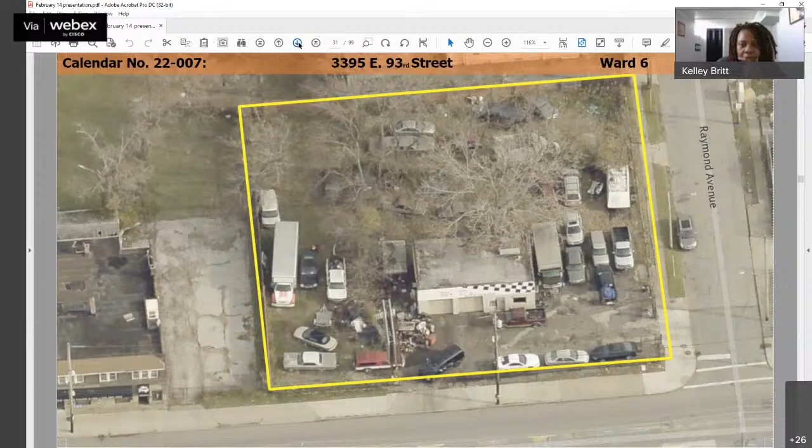Okay, thank you. Mr. Wilborn? Yes. Go ahead, present your case. Yeah, on my—

Well, first of all, I received a grant loan from the city of Cleveland back in 2012, and everything that they asked me to do as far as with the landscaping, we did all of that. We made the ample parking spots and also added gravel as it was instructed to do.

Madam Chair, this is Kim Scott, City Planning. May I offer a comment, please? Yes, go ahead. Sure.

The issue at hand is establishing use as a repair service facility. And what happened was that had not happened—there was never a change of use to auto repair this round. Obviously, as Ms. Kukla was reading the history, an automotive repair use was established in 1977.

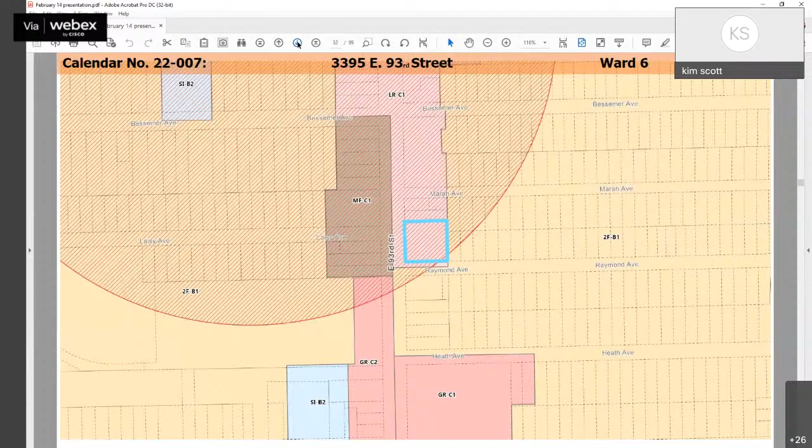Mr. Wilborn has operated this since 2012, and I think it was just that he was not aware that a change of use needed to be done. As he also mentioned, he did participate in the storefront renovation program. So I just want to say that City Planning, in fact, is in support of the variance needed to establish the use at this location.

Thank you. Thanks, that brought some clarity because I wasn't exactly sure what was going on here. Okay, so all the requirements he got last time he did, but there was a failure to actually change the use from—was it a service station previously? Gas station?

At some point it was... I'm sorry, go ahead, Ms. Kukla. Yes, Madam Chair, it was erected in 1940 as a service station. And just for the record, the resolution did state that the city only required the customer parking area to be asphalt, just for clarification.

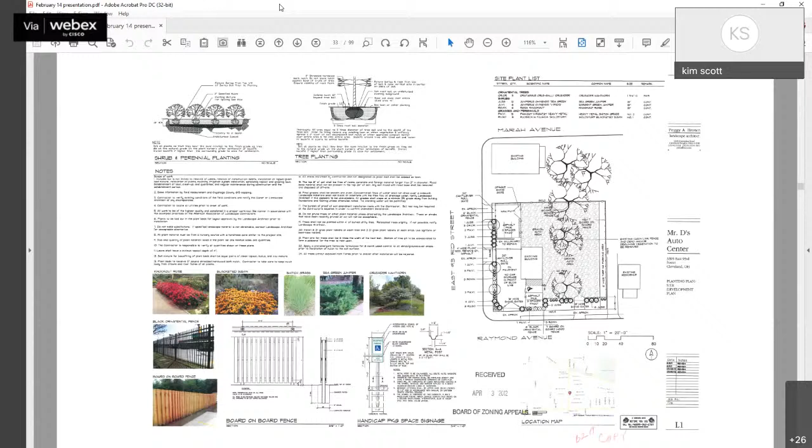So are you saying that hasn't happened? No, all of the things that were asked to be done had been done. Okay, so we're basically just here for the use. Correct. And what we're seeing on the screen here is the actual landscape plan and parking plan that got done previously. Correct.

Okay, Councilman. Thank you so much, Madam Chair. I support this change. Mr. Wilborn is a very well-respected member in the community. I think this is a much-needed upgrade to what he's trying to do. He's a great business person and really just needed clarity. I spent a lot of time trying to understand what he really needed, and he complied with all of the things before. He just wants to make sure he has the change so he can continue to operate his business, which most of the community are very supportive of. Thank you, Madam Chair. Thank you, Councilman.

All right, I'll open up to the board for any questions, comments, or a motion. Madam Chair, unless any of my colleagues have comments, we'll go ahead. We would like to thank City Planner Kim Scott for the clarification on the situation in this case, and with support of City Planning, and also thanks to Councilman Griffin for his statement and support. It seems like this just needs to have the I's dotted and the T's crossed. So, Madam Chair, with that, I think we can go ahead and approve this variance. Thank you. Can I have a second?

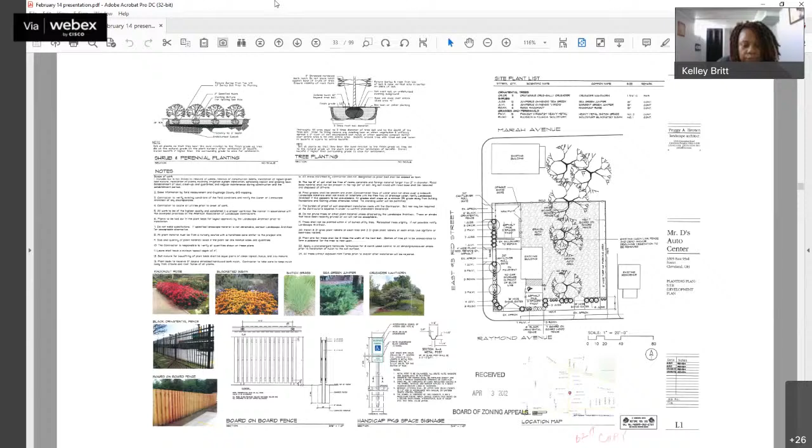Member Brown, I second. Ms. Brown the second. Go ahead, call the roll, please. Thank you, Madam Chair. And this is also with the understanding that the customer parking spaces will be asphalt as shown on the site plan, and all of the landscaping shown on the site plan, which may or may not be fully compliant, as I'm not sure that we saw a 6-foot wide landscape strip along the front or the 10-foot wide transition strip at the rear. The site plan does show that there are some. So with those conditions, I will call the roll.

Ms. Barnes? He's recused. Brown? Ms. Brown? Yes. Thank you. Ms. Bates? Yes. Ms. Britt? Yes. Calendar 22-001 is granted. It'll be ratified next week, and we will send the appellant a letter.

Isn't that 007? Did I say one? Yeah, or is it 7? I have 7 on the agenda. It is 7. It is 7. I apologize, just want to make sure I get it right. Thank you. It's Monday. Yes, thanks. All right, moving on then.

Calendar number 21-203 at 8502 Hough Avenue. Structures Unlimited proposes to construct a new non-separated mixed-use retail office and assembly building on City of Cleveland-owned land in a multifamily residential district. The owner appeals for relief from the strict application of the Cleveland Codified Ordinances as stated in the agenda and the public record. Of note is number 2, section 357.07A, which states that a 10-foot setback is required on Hough Avenue and a 4-foot setback is proposed. Please note that the Board of Zoning Appeals is limited in its ability to grant front yard variances unless certain conditions apply, and we know this happens to us frequently with front yard setbacks.

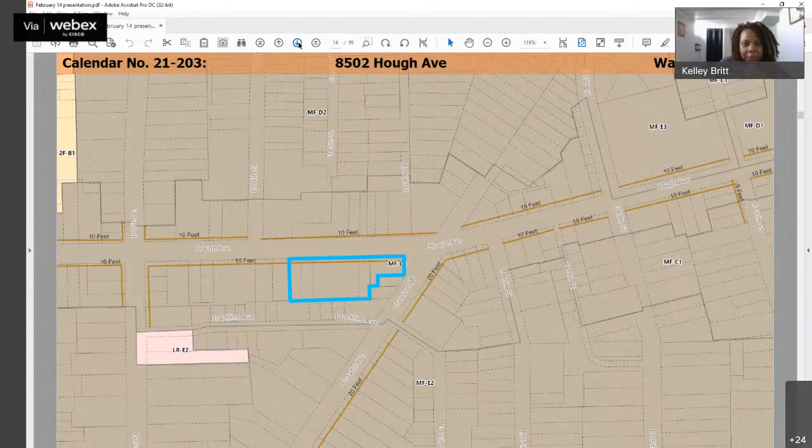Maurice, I'm going to ask you about this front yard setback before we get started. Yes, Madam Chair, we have already had extensive discussions with the applicant about this. They do not meet any of the exceptions for the board to grant.

So what we are going to do here, as we've discussed with the applicant, is go ahead and change the mapped setback in this portion of Hough Avenue. So we would request that you continue to consider this and just not approve the setback variance. That way they could still continue forward with their permitting process. And when the map change is actually enacted by council, they would no longer need that variance.

Thank you. So I like to hear. All right, I know you do. Okay, who is going to be the spokesperson for this case? I will be, Ibrahim Hakki. Okay, Mr. Hakki, go ahead.

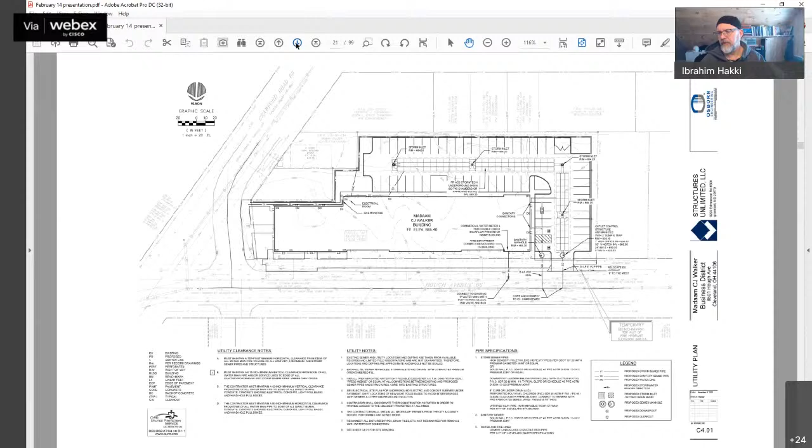And with that, we're asking for approval for the change of use. And then I can also speak regarding the landscape buffer. If you can go to the 8th drawing, which is the architectural site plan. That one, oh, go back. Did I just pass it? That one? Right there. Okay.

So we do have the parking tucked away to the back side as much as we can, with an entrance off of Hough. The landscape buffer is between the sidewalk and the parking. Unfortunately, we could only fit the 4 foot in there, so we're asking for relief to use a 4 foot landscape buffer rather than the 6 foot landscape buffer. To extend it out, we would lose 2 parking spaces specifically, which we feel we would really need to support the retail use of this building.

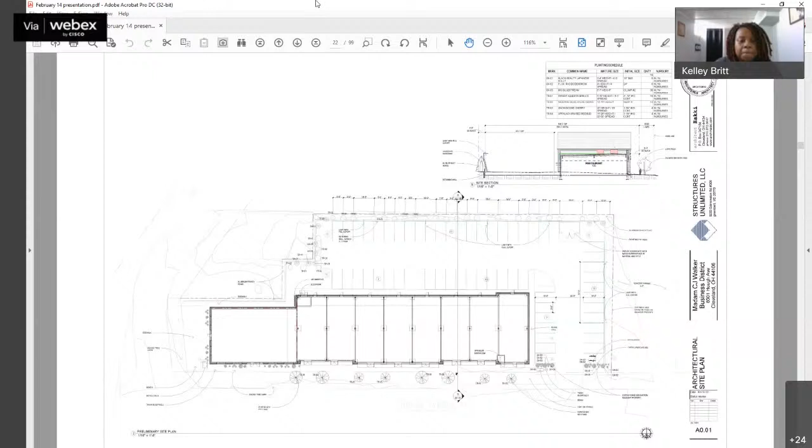Okay, Mr. Salam, did you have anything you wanted to add? Yes, thank you, Madam Chair. We've been working on this project for the last year and a half.

We were very pleased to come into the Hough District and develop this project, which is very important to the citizens of the Hough District, knowing the history of Hough and it used to being a very vibrant commercial and residential center. We feel strongly that this will add to that historical flavor, but also move it forward, as it will be an entrepreneur incubator along with a credit union, because we know in this area there's a financial desert in the Hough District. Our goal is to really try to implement the needs of the community and give it a real sense of place.

No better situation could be than naming it after the first millionaire, black or white, in this country, Madam C.J. Walker. And so we really feel committed to this project. We were very happy to hear the concerns of the board about the setback, and we see that often in many of our projects, but it's nothing we can't overcome.

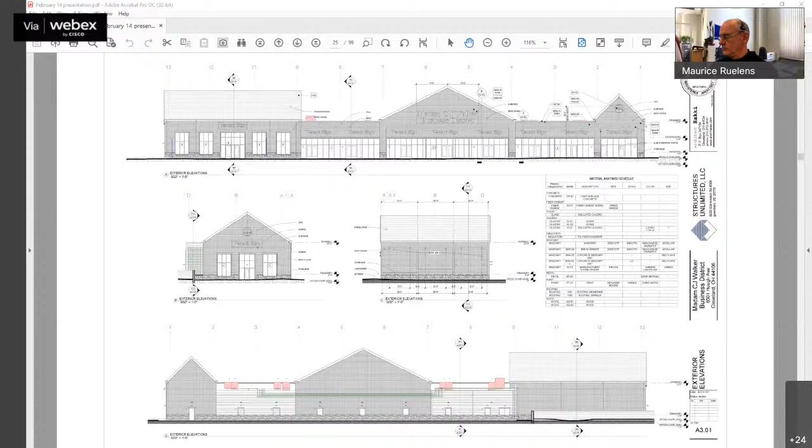Thank you. Liz, is that okay with you? I think that clarifies the question, Madam Chair. I'm not sure if that would be something the board would want to hold ratification until we see transfer. We've done it both ways in the past, where the board has granted the variance and just allowed the land bank process to work out on its own. They are two separate approvals.

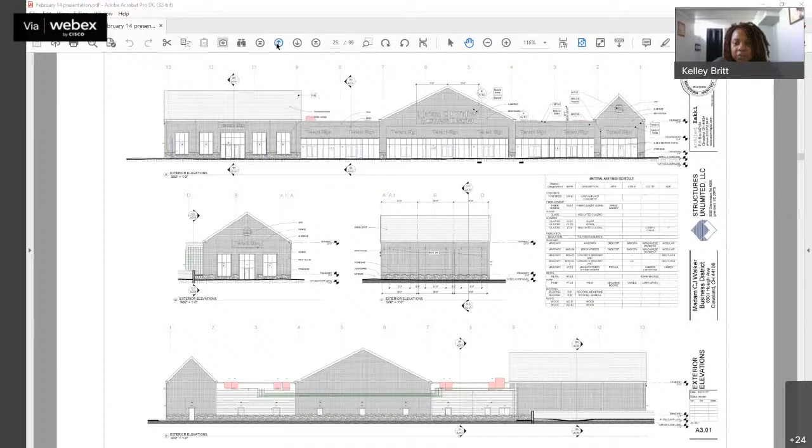All right, I'll open up to the board for any questions or a motion. If you do put up a motion, I would recommend language about waiting for clarification on the land bank transfer, as well as not granting this front setback issue, because that's going to be changed. So go ahead, board. So, Madam Chair, you want to hold ratification until we have verification of the transfer? Yes. Okay, all right, unless my colleagues have any other questions or comments, I'll go ahead.

All right, Madam Chair. Given testimony from Ms. Scott from City Planning and a statement by Mr. Ruelens, also from City Planning, the appellants have stated their case.

We are aware that there are many projects going on in the Hough neighborhood, particularly residential and multifamily, and this project will support those. So pending notification that the land bank property has been transferred, we'll hold ratification for that. We will not be addressing item number 2, regarding the front yard setback, so we'll go ahead and approve item number 1 and item number 3 on the agenda today.

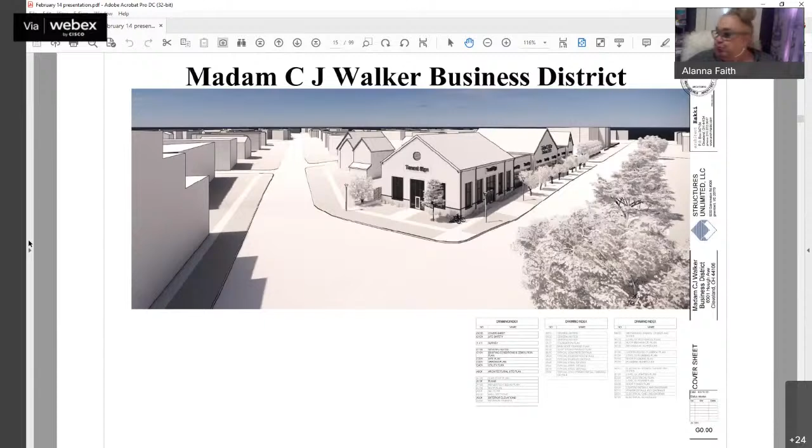Thank you, Madam Chair. Ms. Brown? Yes. Ms. Barnes? Yes. Ms. Faith? Yes. Ms. Britt? Yes. Calendar number 21-203 is granted conditionally.

We will hold it until we get clarification from the land bank regarding the land transfer. Once we receive that, we will send the applicant a letter. Thank you.

You're welcome. Oh, we have 176 next. Okay, yes. All right, go ahead. Moving on, Calendar number 22-008.

This is at 1269 West 76th Street. John and Tamara Lagutia, owners, propose to change use of an existing one-story masonry and frame industrial building to a single-family residence with a new attached garage addition in a G3 multifamily residential district. The owners appeal for relief from the strict application of the Cleveland Codified Ordinances as stated in the agenda and the public record.

With that, Madam Chair, I'll turn it over to Ms. Brown for the oath. I'm swearing in all who are present for this case. Do you swear or affirm that the testimony you're about to give is the whole truth and nothing but the truth? Please raise your hand and reply, I do. State your name and your address, please.

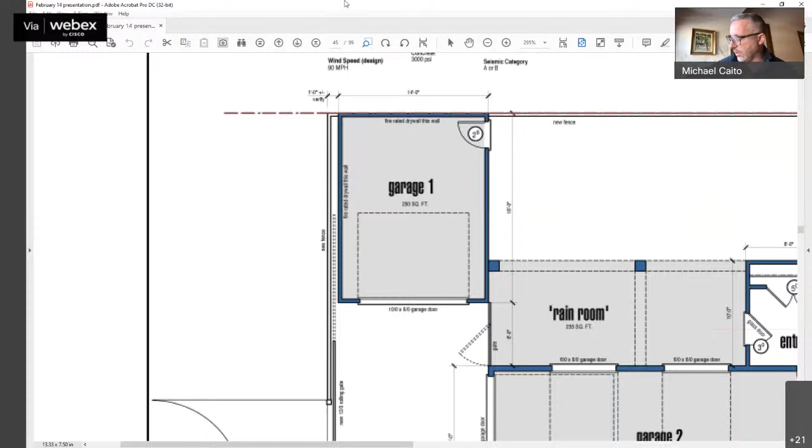Number 4 is really about fencing. States that a fence running parallel to a building on the same lot shall not be less than 3 feet. So code says we have to have 3 feet between a building wall and a fence. We're proposing 2 feet and 1 foot.

So I'm going to explain the 1 foot. It's on the left side of garage 1, where the automated gate is going to retract into. It's not really a space. We're going to have a wood gate that retracts back, sliding into a pocket, so that when closed it just looks like a clean wood fence going across garage 1 and the driveway.

The other dimension of 2 feet is not correct. It's actually 2.8 feet. One of the drawings I had earlier in this PDF shows that the existing building is 2.8 feet off that top property line. So the top line that goes across is really 2.8 feet, not 2 feet, from the building. Minimum distance is 3 feet according to code, so we're really just 0.2 feet off of that minimum. That's a very, very minimal variance we're requesting.

That is going to be a 6 foot tall fence, and the reason is we have these large windows we want to maintain. That 6 foot fence gives us some privacy directly to our south, which is again above that fence - just a vacant lot. We're not sure what's going to happen there.

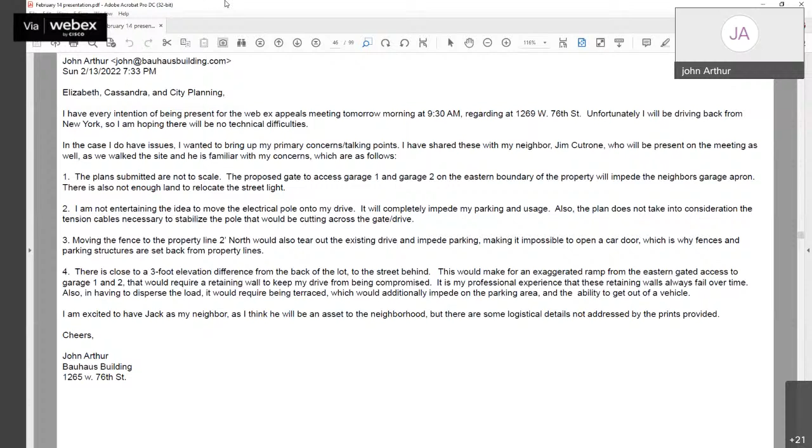My primary objection is based around my current drive and what it looks like moving the electric pole into a parking space in my drive. That's my primary objection to moving that. If it's going to be moved, I think it could be moved farther south.

The other concern I have is that while the building addition stays within the current lines, even 2 feet off the property line, the fence shows it jutting in to where you pretty much can't open doors, which would completely take parking away from my drive. I'm also not sure, given how aggressively sloped that drive is, that the apron going into 75th would need some kind of terraced retaining wall, which would again take away parking, because there's about a 3-foot elevation gain from 75th to where our lots are situated.

Where are your lots, sir? I am number 38 there.

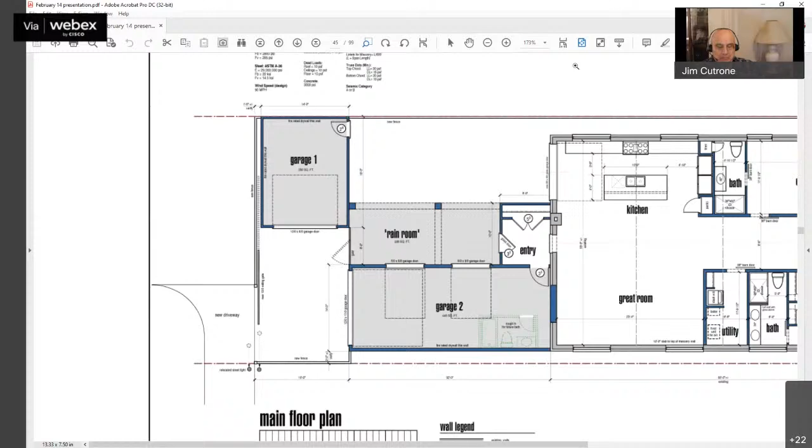Madam Chair, could I speak? Oh, I'm sorry. I also don't know how they would handle having a retaining wall there, with the grade that would need to be achieved for that apron. Okay, so your issues today are the utility pole and the grading of their property and how it will affect your property. Correct. Okay, Mr. Arthur—

Mr. Cutrone, is that who wanted to talk? Yes, that's correct. Okay, go ahead. Thank you. First of all, I'd like to welcome Jack and Tamara to our neighborhood.

I've lived here since 1989 and been active in the neighborhood. I've been through all the design efforts for Battery Park. I've seen a lot. I've been active in the block club, was co-chair for 18 years. So my background in the neighborhood is extensive.

One thing I'd like to point out is that these properties are artifacts of a different time, and it's difficult to fit them into the Battery Park scheme in a very superficial manner. The plan described by the architect is very nice—I congratulate them on how they're treating the property—but it was all about this property.

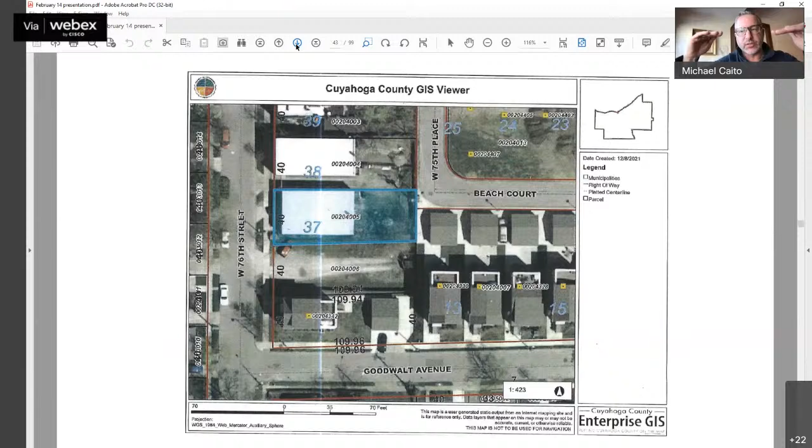Yes, I will. We have not studied the topography yet of that rear apron that's coming in. So what we usually do is, we would probably set the two garage slabs down a little bit and lower that driveway just a little bit to transition to West 75th Place's grade. Again, when we were out there, it looked like it was relatively flat, but I understand that there might be a slight change in grade between the alley and our current rear yard.

In response to, and I totally agree with all the comments that were made today, I think all neighbors need to get along, and we don't want to ruin the ability for someone to use their property for whatever we are doing. But the fence that we are questioning is right on this screen. If you're looking here, that fence that's along the property line, that's not even something we're asking. That's not a variance to put a fence on a piece of property. The neighbor to our north does have an 8-foot clearance from our property line to their building to get back there. And I will also say one thing about the telephone pole or the electrical pole.

I believe that electrical pole is going to be on the property line, not necessarily on the neighbor's property. I know on this drawing right here, you see two little circles. We are just indicating that the electrical telephone pole would be moved. It will most likely be right on the property line and not shown like we showed it here. And that's something that we have to work out with CPP on as to where they feel it's the best fit. We're trying to keep it as close to our fence, and maybe it ends up at the end of our fence, I'm not sure yet. We have a case number, and we've already applied to have that pole moved, but we don't have any details of exactly where CPP wants to put it. So they're evaluating that right now.

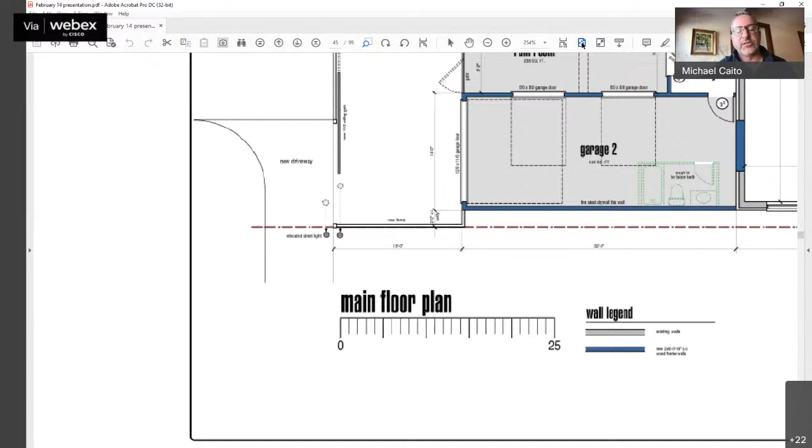Again, so grading, we will deal with the grading between West 75th and our rear driveway and garages. It might be bringing the slab down a little bit so that there isn't a huge transition there. But that fence that's on the bottom of our sheet, that's allowed by code. We're not requesting a variance for that specific fence right there.

I think I should probably add a few comments. I'm the homeowner. Is this Jack? Yes. He was sworn in. When you start speaking, you have to say who you are. All right, sorry, not used to these. No problem.

My wife and I were living on West 67th since 2003. So we were here in the beginning when all this development started happening. We fell in love with the neighborhood, and we've known Michael since the 1990s, and we wanted one floor living for a long time. And when we found this building, we absolutely fell in love with it. And before I did anything, I went to Councilwoman Spencer and asked her if we bought this and wanted to convert it to residence, would we have her support? And she was very enthusiastic about helping us.

I'm very detail oriented, and there was one big problem in the beginning that really troubled me, and that was the fact that we have no access to our backyard. So we only own 2 feet 8 inches to the south, that's on the upper part of what you're looking at right now. So you can't get a car in there, you can't drive your car into your backyard, obviously. Now there is a 10-foot driveway that separates us from our neighbor, John Arthur, to the north.

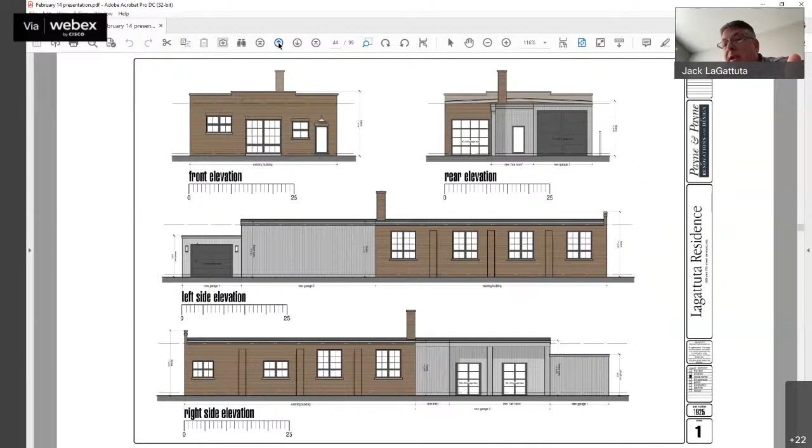At considerable expense, I had this survey done, and I have hired a lawyer, Adam Rosen, who deals in contract law and real estate law. He drew up an easement, as you'll see, so that I could have in writing a legal document that said I would be able to drive my vehicles from West 76th Street into my backyard, because obviously I have no choice to the south.

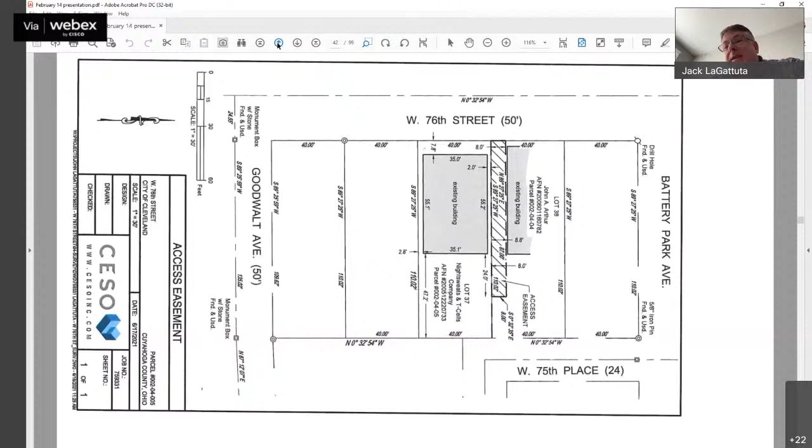I only own 2 feet 8 inches. So to the north, there is a 10-foot concrete driveway that separates my building from John Arthur's. I own 2 feet of that from West 76 going all the way to the back of the property. John owns 8 feet of that. And I got to tell you, I invested about $7,500 between legal fees and surveys so I could have the

easement signed by my neighbor prior to the purchase of my building. Although we had COVID and we had a lot of delays, John informed me via text before the closing of the building that he was unable to sign, at the advice of his lawyer, that easement. So I was requesting an easement to allow me to use my 2 feet of the driveway to get behind my building and park my cars.

You see the gate is on my building here. That's the gate that John uses for his driveway that he owns 8 feet of and I own 2 feet of. And he has his gate on my building. I want to be a good neighbor. But when I went to buy this property, I needed to have access to my backyard.

And at the very last minute, the rug was pulled out from under me and there was no easement signed. So now I go ahead and invest $325,000 in cash for my building, and I can't use my backyard.

Now, the last thing I thought would have happened on this conference call is that my neighbor, who needs my 2 feet, by the way, to use his driveway, is going to decide that he's uncomfortable with me entering my property from a street that my architect designed for off-street access. This is what the city wants. They don't want more traffic on West 76, me and my wife pulling our 2 vehicles in and out. They would love for us, you would think, to use an access road in the back.

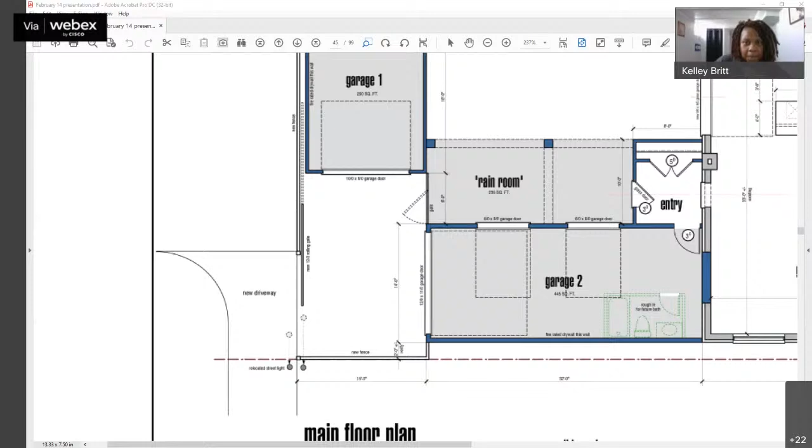Okay, so it is very difficult to get surveyors to come out and survey, they're so backed up. Prior to this meeting, I hired CESO surveyors to do a detailed survey of this area in the back to make sure that I wouldn't be infringing on anybody else's property for my driveway entrance. And it clearly shows that it has nothing to do with any other private property. Whether the street light gets moved to the north or south hasn't been determined, but there are plenty of options for the Cleveland Public Power street light to be moved onto public right-of-way, not on any private property. And in no way, shape, or form does my driveway entrance in the rear affect anybody else's private property. It may cut into the public right-of-way with the apron, but I was told early on in this process that's 100% okay by some director in sidewalks and streets and whatnot.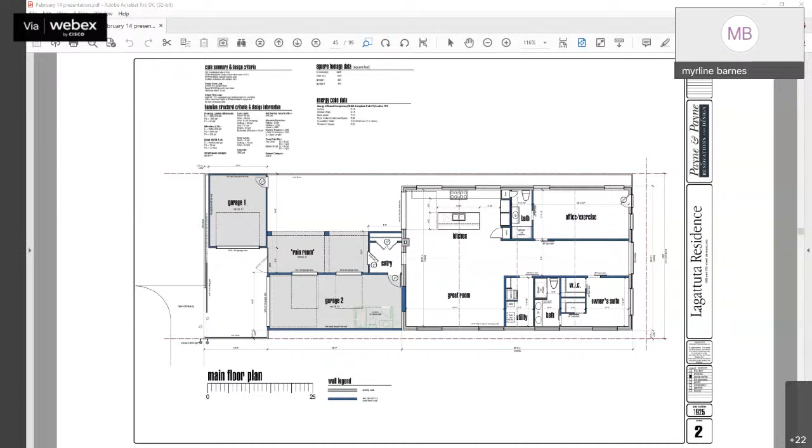Point of clarification, Madam Chair. Again, I don't think you're granting a variance to number 1. They're just saying that they're going to provide those details for 1 and 5, correct? Because you're not granting a variance to... Yeah, definitely not 5. And number 1, they have testified that they will do that in accordance with building and housing. So as long as they provide that, we're fine.

Okay, we got a second for Ms. Barnes. Go ahead, call the roll, Ms. Kukla. Thank you, Madam Chair. And this is, again, clarifying, we are approving items 2, 3, and 4 on the agenda. Yes. Thank you. Ms. Brown? Yes. Ms. Barnes? Yes. Ms. Faith? Yes. Ms. Britt? Yes.

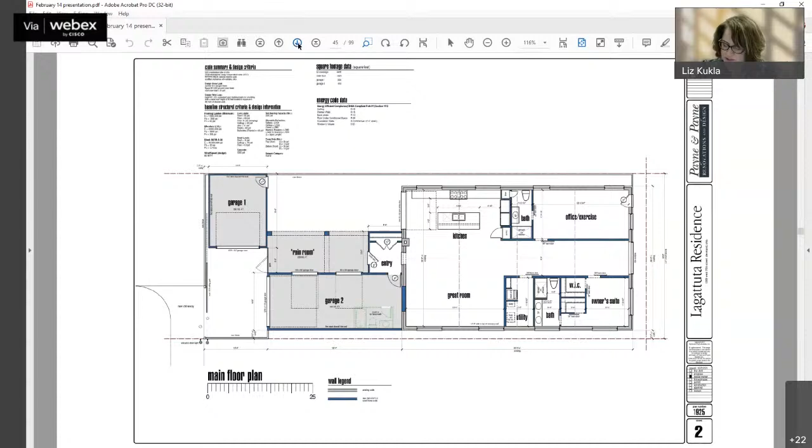Calendar number 22-008 is granted conditionally. We will hold ratification until we receive that updated cut sheet. And once we receive that, we will ratify the case and send the applicant a letter. Maurice and Ms. Faith, we're going to go to West 41st Street first, then we'll save this appeal for last. Okay. Thank you, everybody. Thank you. Good luck to you. Thank you.

Okay, Madam Chair, at your request we are going to move calendar number 21-160 to the next item. This is a rehearing. The original hearing date was January 24th of 2022. Drama Free Ministries owner proposes to change the use from store and office to a restaurant in a C2 local retail business district. The owner appeals relief from the strict application of the Cleveland Codified Ordinances as stated in the agenda and the public record. Of note, this variance was approved pending revised drawings showing 10 parking spaces. The city requested a rehearing to allow time to present the plan again, showing that the parking lot is not on the same parcel.

So with that, I will turn it over to Ms. Brown for the oath.

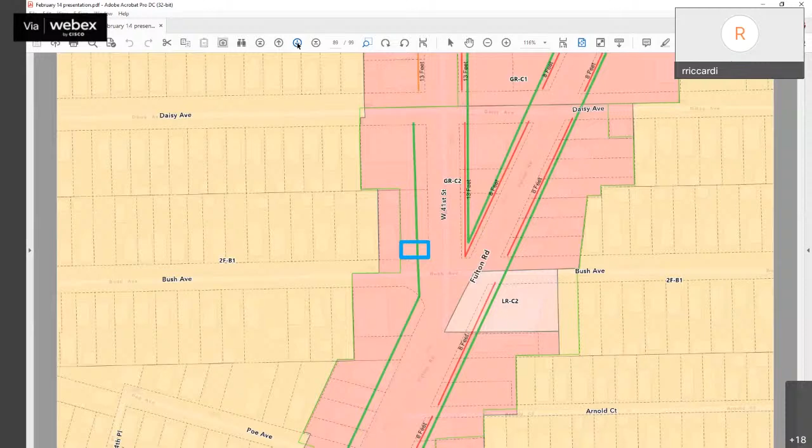Okay, Mr. Riccardi, your hand is up. Yes, with the addition of the plan, that will become his plan now. It was lacking before. The only variance that would be needed is that the landscape strip along the street screening the parking lot is required to be 6 feet wide, and it looks like it's 3 foot wide. So that would be the only variance required.

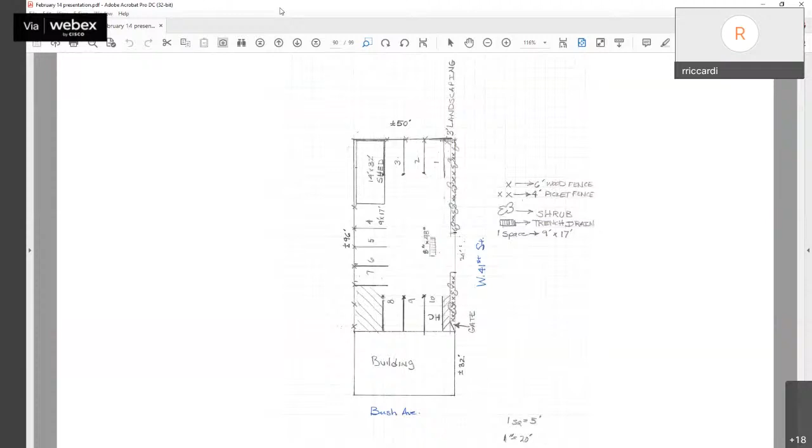Thank you, Mr. Riccardi. Okay, Mr. Flonnoy, if you had anything else you wanted to add, seems like the city got you properly represented here, but go ahead.

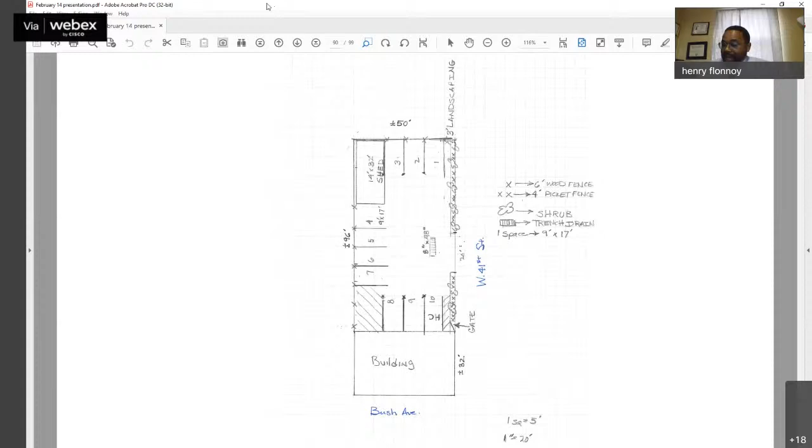No, Madam Chair, I just want to say thank you and the board for allowing me to come back on this Zoom call again. I know it's been a lot to unpack. It's been a lot to unpack for me as well. I hired some people and thought I was doing some things in my best interest. I ended up sitting down with some capable people from the city to help me maneuver this thing, and I just want to move forward at this point, if possible.

Great, thank you. Okay, board, we only have one variance here to grant for the landscaping strip, so I'll entertain a motion.

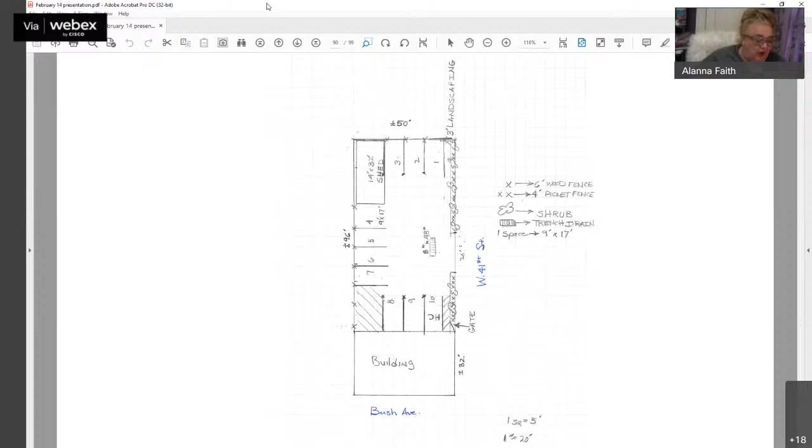Madam Chair, we're very glad that Mr. Flonnoy was able to get assistance to get this all squared away for himself. As much as we enjoy seeing him, we'd like him to be able to move forward on his project. So with that, I move that we go ahead and approve his variance at this time.

Can I have a second? Second, Ms. Barnes. Ms. Barnes is the second. Go ahead, call the roll, Ms. Kukla.

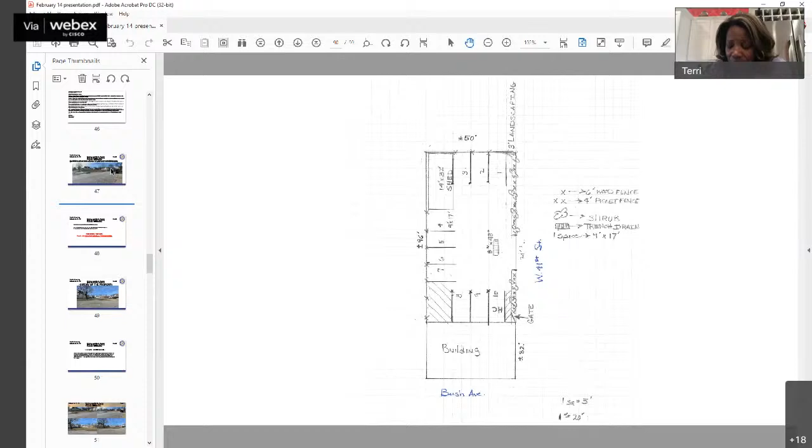Thank you, Madam Chair. Ms. Brown? Yes. Ms. Barnes? Yes. Ms. Faith? Yes. Ms. Brett? Yes. Calendar 21-160 is granted conditionally, noting that we are only granting section 2 today.

It'll be ratified next week, and we will send the applicant a letter. Thank you. Good luck to you, Mr. Flonnoy. Thank you all.

All right, Madam Chair, on to the last case for today, calendar number 21-192. This was postponed from January 24th of 2022. This is B.R. Knez Construction Incorporated, appeals under the authority of Section 76-6 of the Charter of the City of Cleveland and Section 329.02D of the Cleveland Codified Ordinances, the decision of the City Planning Commission to deny approval of a proposed townhome development. This was filed December 3rd of 2021 with no testimony.

The first postponement was made at the request of the Law Department to allow time for further review. And with that, to Ms. Brown for the oath. I am swearing in all who are present for this case. Do you swear or affirm that the testimony you are about to give is the whole truth and nothing but the truth? Please raise your hand and reply, I do. State your name and your address.

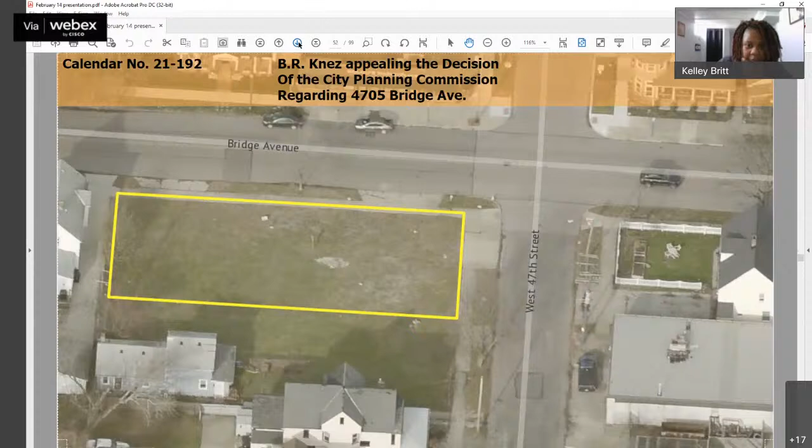Thank you. And Lori, did you want to add anything, because the city had to look over this first before it came back? No, I don't think so. There were just some technical things I needed to look into as far as the appeal goes, but those have been resolved and the appeal's properly before this board. Okay, thank you. I think there's a history here, but I'm sure Mr. Coyne will adequately detail that.

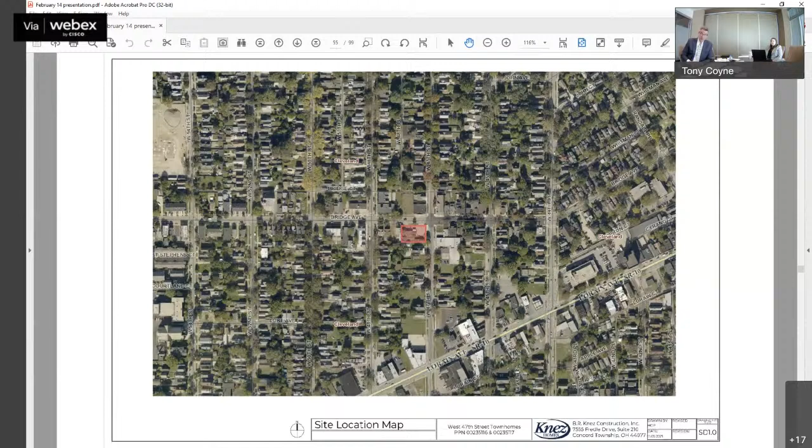All right, go ahead, Mr. Coyne. Madam Chair and members of the board, again, my name is Tony Coyne and I'm land use counsel for the applicant, B.R. Knez Construction. The design will be handled by Hanna Cohan, she is the architect for the project. The brief history I'm going to give you, because you've actually seen this site before, but this was a townhouse development undertaken under the zoning code and is in complete compliance with the zoning code.

It got approved by planning and then it was disapproved by planning, and we are in court over that prior decision, okay? While in court, the court in the 8th District and Common Pleas Court as well in Cuyahoga County, they have a mediation program, and they requested we submit the matter to mediation, and we participated in mediation. We then were suggested to meet with planning staff to see about changing the project and amending it.

So we did do that. Since we were already code compliant, it was a bit of a challenge, but there were changes made to the plan that were done to make it more compliant, if you will, to a not yet approved townhouse code that is being reviewed by City Council. So in other words, what we had learned is that this project and other townhouse projects, they're trying to get more compliant with the new townhouse code. May sound unusual because it's not in effect, but we had our architect take a look at it.

We then met with the former planning director and the neighborhood planner, and we enhanced the project. We were told, however, that we had to go back to the planning commission. In other words, we couldn't reach a traditional settlement before the mediator, we had to go back to the planning commission. On October 5th of 2021, we went back to the planning commission and Hanna Cohan presented the project. At the commission, there were 2 modifications to the plan that were requested, and the applicant agreed to those modifications. There was little discussion, a motion was made to approve the revised plan, and it was seconded. However, only 2 members voted for the revised plan and 4 voted no.

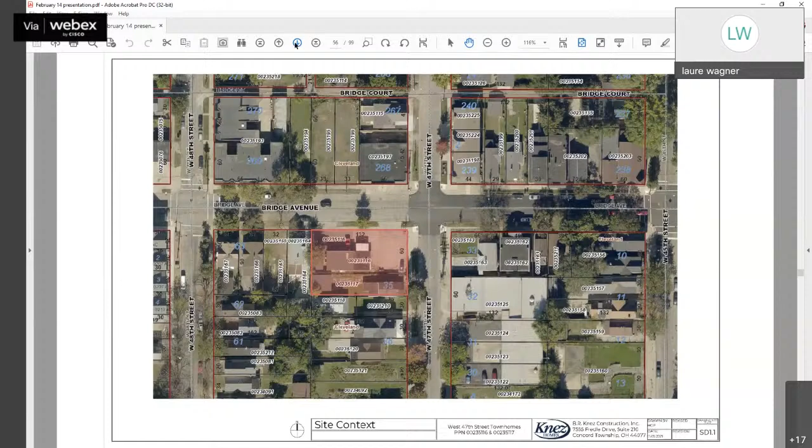Madam Chair, on that question you're asking, which I think is important, but if we approve and the Planning Commission doesn't, aren't they still in court? No, if I can respond, Madam Chair, our decision would appeal the Planning Commission. So they're coming to us to appeal that decision. Thank you so much. No problem.

Okay, go ahead, Hannah. Madam Chair, this is Liz, if I could ask one thing. Has the appellant applied? Is this under a separate B number that might actually make a difference? Or are we still looking at the same building and housing application that was made at the original hearing, back in, was it last year or the year before? Yeah, this was done as a new application at the request of the law department. That's correct. Thanks.

Okay, Hannah, go ahead now. This is an appeal of a decision, so we don't need the same presentation you would give Planning Commission because we don't rule on design and all that kind of stuff. So just give us the highlights.

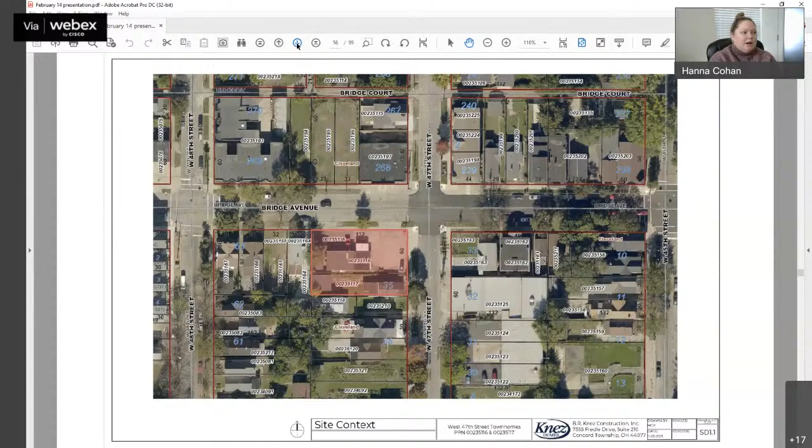Okay, thank you. Just a quick background, our site is shown here. We are at the southwest corner of the intersection of West 47th and Bridge Avenue. If you could go to the next slide, you can see some context photos of the existing properties around. This site was a former auto repair shop that has since been demolished and is now sitting vacant. There is a commercial market across the street on Bridge, townhouses on the northeast corner, and a single family residence to the direct east of our site.

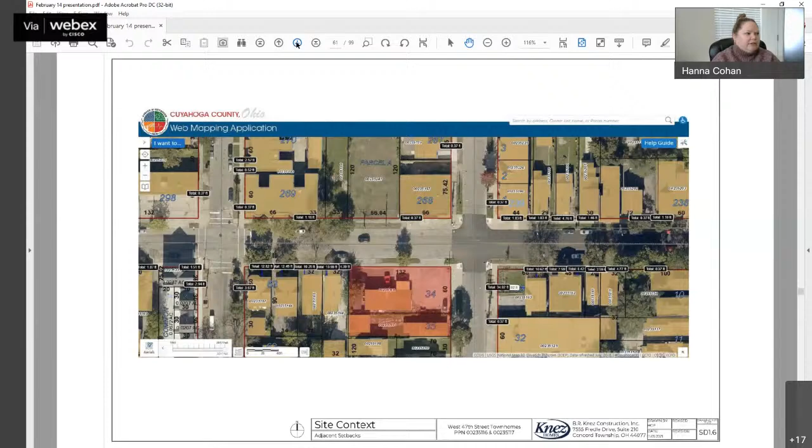Coming back to Bridge is more of a mix of commercial and mid-density residential. And as you move north into the more residential neighborhood, you get to Franklin, which is more residential. So Bridge is that midpoint in between Lorain and Franklin, where it is appropriate to have that mix of commercial

and mid-density residential. This is a diagram showing setbacks. There's a green line on there - if you zoom in, you'll see it a little better. That shows 3 feet off the property line for all the blocks around our site. There's a red line at 5 feet and a blue at 10 feet. So you can see the setbacks are very close to the street, up and down Bridge. It's pretty common to be in that 0 to 5 foot setback range.

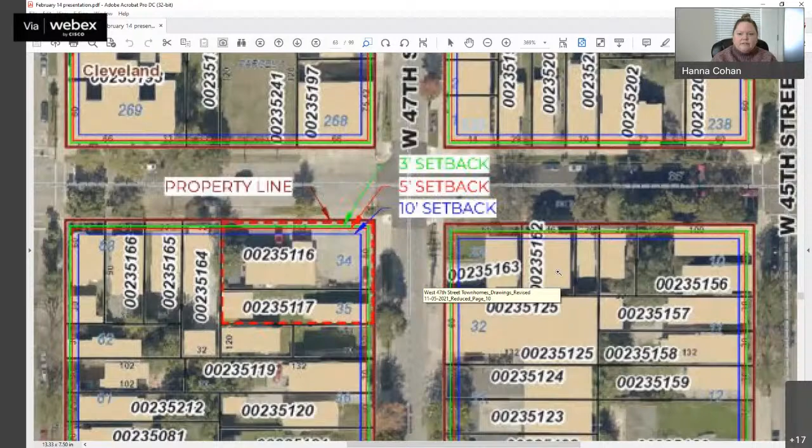Eliminating that unit has allowed us to achieve 2 goals that we were pursuing. One is to increase the setbacks. So our interior frontage setback, which is from units 7 through 11 to our interior property line, is increased from 7 feet to 9 feet. Our interior side yard setback against unit 11 is increased from 5 feet to 10 feet.

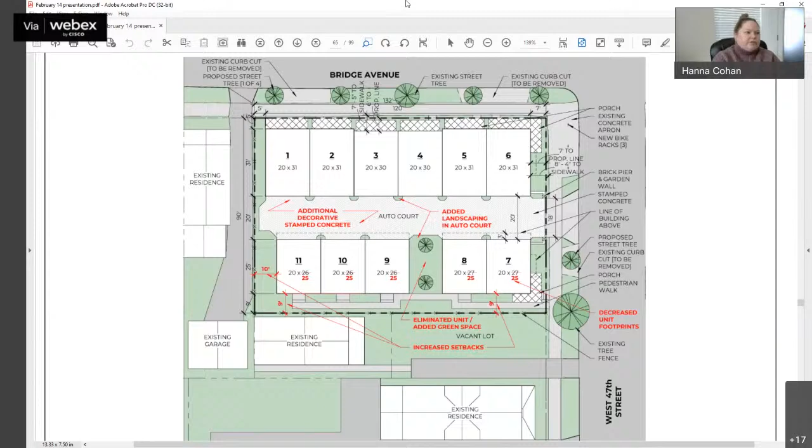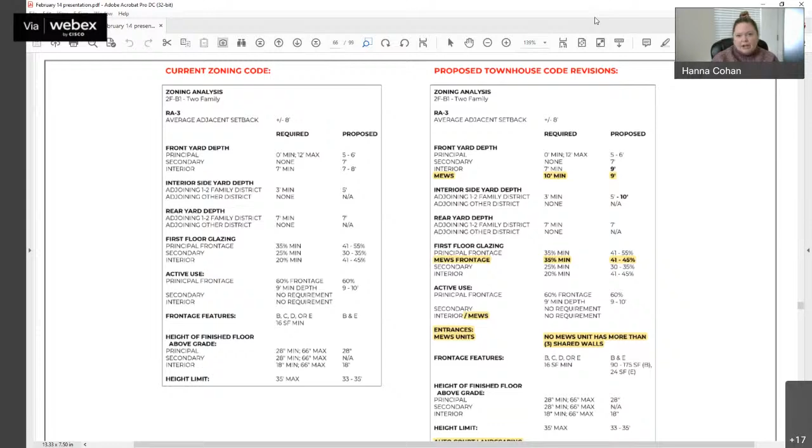If you go to the next slide, on the left is the previous zoning analysis. On the right is our current zoning analysis with our revised plan. And then highlighted in yellow, we've added some of the items that Tony referenced that are not currently required by code, but are potentially going to be implemented by council in the next coming year. So we're trying to show a good faith effort to work towards compliance with what we believe will be required in the future, but is not actually required of us now.

So Hannah, just a quick question before you continue. I think I heard this, I just want to make sure I get this straight. So your first submission got approved by Planning Commission. And so did the new townhouse code trigger you to have to go back to them? Or no. You made a change and then that's what happened.

Madam Chair, could I explain maybe the legal things here? They had to go back to Planning Commission. If you recall, this Planning Commission approved this project. It came to, the appeal was taken to BZA by some neighbors. The Board of Zoning Appeals last time did not find that the decision was arbitrary or unreasonable. It just felt that their neighbors were indicating they had not all gotten notice. There was some dispute about that, but the Board of Zoning Appeals sent it back for another hearing just so everybody who wanted to participate could be sure in participating. And the plan, as I understand it, is identical.

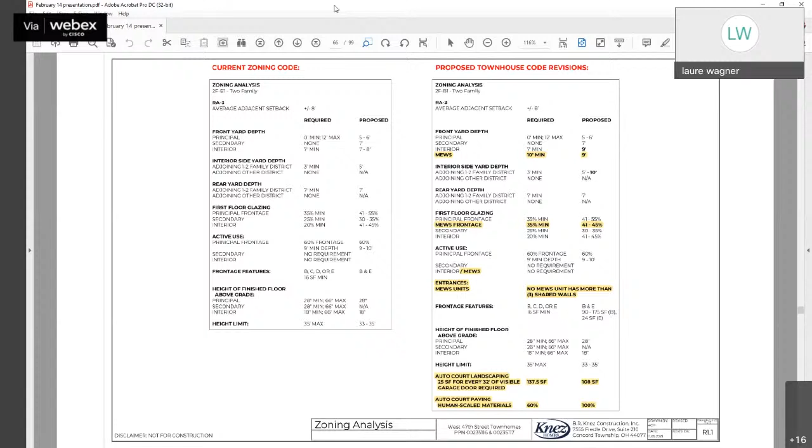There may be a few changes that are more code conforming, but the new townhouse code cannot be enforced unless and until it's enacted by council, and it would not apply to this project because projects are judged by the zoning code as it exists at the time of the application. I think what the appellant here is indicating is they made some changes just to make it more conforming with what the city is planning to have in the townhouse code, but that code is not applicable at this point in time. I think the appellant can correct me if I got any of that wrong. Yeah, that's what I was trying to get at, just to make sure everyone had the facts straight, including me. So thank you, Lori.

Go ahead, continue, Hannah. Thank you. And I would just say we agree with Lori's summary there that matches our history.

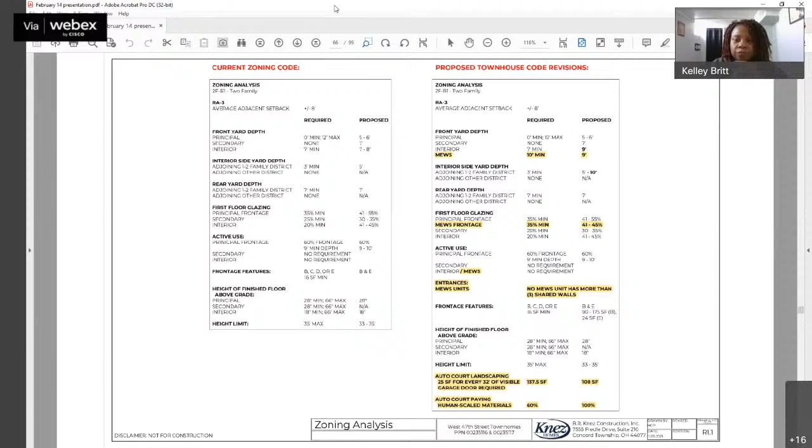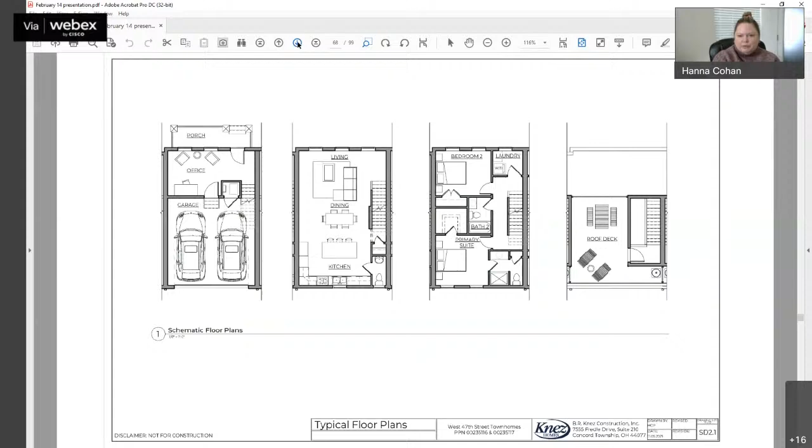Next slide, please. This is a sample floor plan. I think we can probably skip this. One thing to note, every unit has a private roof deck, so everyone has some public outdoor space that's shared and some private outdoor space on their own roof deck.

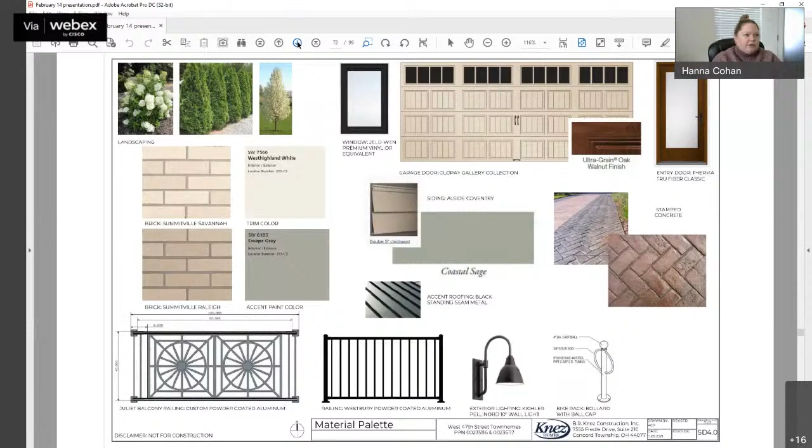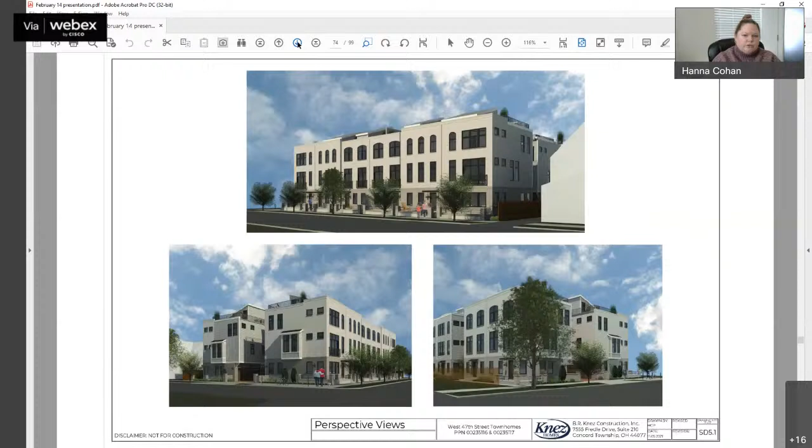The next slides will take you through rendering so you can see what the exterior is going to look like. Again, you can see the two-tone brick, the large amount of glazing, the porches. We are proposing adding landscaping, including street trees along Bridge that you can see in those renderings. These are both views from Bridge. The next slide will show you from Bridge looking east, as well as two views from 47th Street looking towards the sides of the buildings.

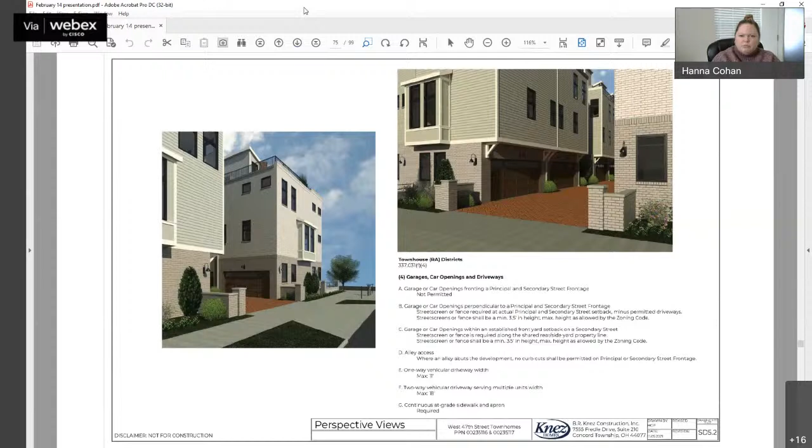The next slide particularly was just to focus in on some of the detailing we're proposing at the auto court, which has come up in prior meetings. We have brick wing walls that screen the vehicular entrance, with landscaping around them, plus the landscaping and stamped decorative concrete in the auto court.

This highlights the particular requirements in the code for an auto court, and I wanted to emphasize that we are complying with all of those items.

The last thing I want to touch on briefly is the section in the townhouse code focused on site planning and design, and the 4 criteria laid out there for how to evaluate these projects. The first criteria under site planning and design is compatibility.

Our project is designed with the scale, height, setbacks, and orientation to the street that fully complies with the zoning code and is designed specifically to maintain the neighborhood continuity and continue the character of the existing architecture. We're using brick cladding, found frequently on the older townhomes in the neighborhood, Juliet balconies, custom metal accents, front porches including wraparound porches at the corners, all to enhance the architectural character of the neighborhood.

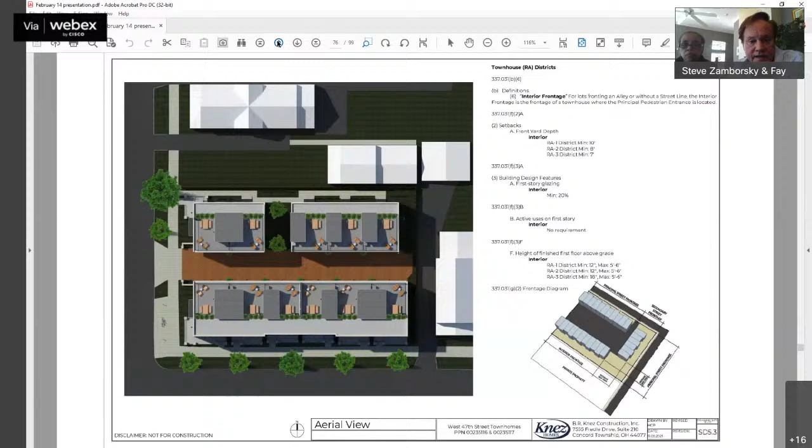Last week, we submitted a letter to the board with our comments about the appeal. And I just wondered, did you receive that, Madam Chair? Have you had a chance to read it? Not that I remember. Ms. Kukla, did we get that? Madam Chair, we received that late on Friday. I believe that Maurice Rowlands has a copy of it and has included it in the PowerPoint today. Sorry, going the wrong way.

There we go. Okay, so this is the letter. All right. So we have your letter. Go ahead and give us the highlights of this letter. Okay, Maurice, are you able to show that as a single page so it's a bit larger? Oh, I can zoom in onto one. Oh, all right. Well, all right. So, I think you all understand that I'm one of the appellants and property owners who came to the BZA in 2019 regarding the developer's original townhouse proposal.

And for context, there were two other appellants, and on page 1 of our letter, we show three photographs of our three properties at the intersection where Mr. Knez is proposing to build the townhouses. On the bottom left photograph with the turret is the townhouse that I live in. So, in fact, I don't have anything against townhouses. I live in one and I love it and I welcome more. In the top right corner you can see a little blue house in the background behind the development site. That's Haydee Pagan's property, and she is on this call to speak to it.

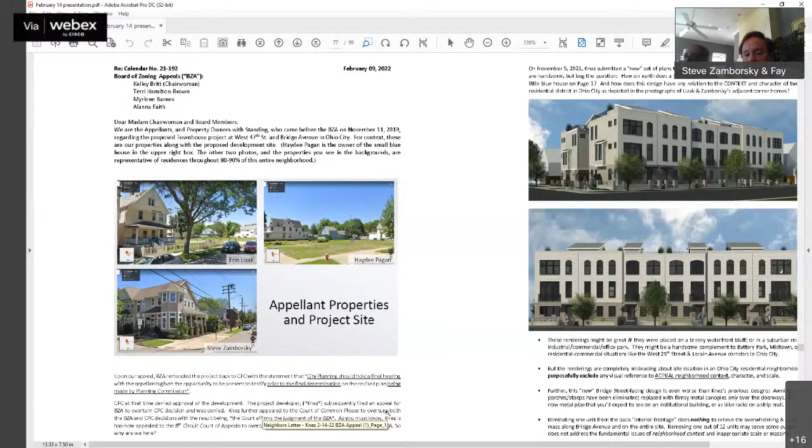So then looking at the rendering on page 2, over to the right of the screen, you've got the rendering of the developer's project. All right, and it's a handsome building, there's no question about it. But if you look at that and then look at the site in front of Miss Pagan's little blue house over on the left, it begs the question, how on earth does the form and the mass of this structure fit onto the site in front of Miss Pagan's little blue house? And how does this design have any relationship to the context and character of a two-family residential district in Ohio City? Again, the townhouse that I live in fits the context and character of the neighboring homes up and down Bridge and West 47th Street.

So the renderings are great, but they're a bit misleading about the site location in an Ohio City residential neighborhood. They simply exclude any visual reference to the actual neighborhood context, character, and scale.

Remember, compared to what you're looking at, our three properties on the corner are characteristic of the properties going down 47th Street and the properties on the neighboring block going either direction on Bridge. Remember, this design is a double row project with an auto court in between.

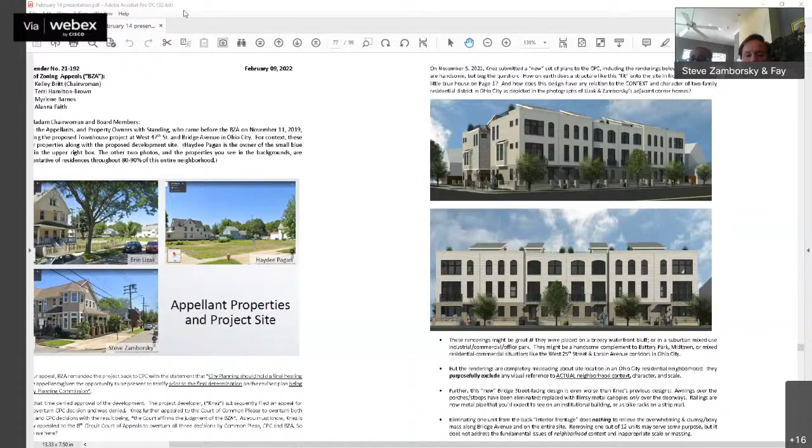So after much discussion, CPC did reject the new plan that we just saw on page 2, in a 4-2 vote, as Mr. Coyne pointed out. So now Mr. Knez has appealed to you again to overturn a CPC decision on this site. And the developer rails at CPC members making judgments regarding layout and design.

But over there on the right, here is exactly what the townhouse ordinance says, paragraph 337. Maurice, can you maybe blow that up a little bit?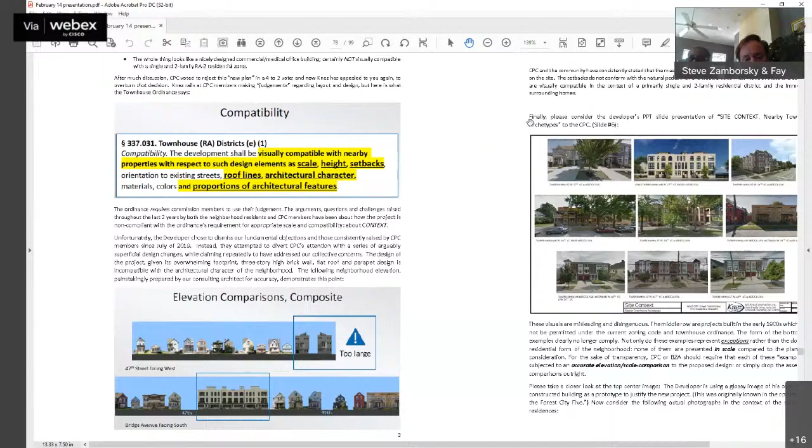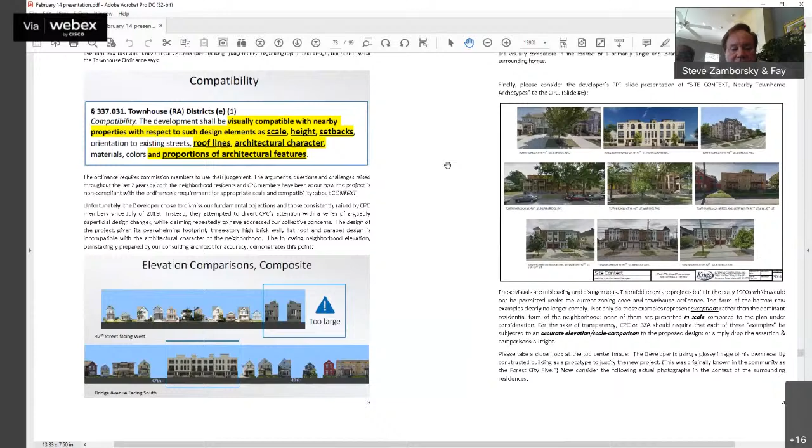The compatibility, what are you talking about? Pardon me? It's hard to hear you. What were you saying? Oh, I'm sorry. Can you blow up the compatibility paragraph with the yellow highlighting, so we can see that clearly?

Yeah, so right out of the Townhouse Code, paragraph 337.031: the development shall be visually compatible with nearby properties with respect to such design elements as scale, height, setbacks, roof lines, architectural character, and proportions of architectural features.

So the ordinance requires commission members to use their judgment. The questions and challenges raised throughout the last 2 years by both the neighborhood and CPC have consistently pointed out that the project design fails to comply with the ordinance's requirement for appropriate scale and compatibility. Context is everything here. The design of the project, given its overwhelming footprint, 3-story high brick wall, flat roof, and parapet design, is incompatible with the architectural character of the neighborhood.

That's not to say townhouses don't fit in the neighborhood. It's to say, back on our page 1 illustrations, this project is so massive compared to the character going up and down West 47th Street and Bridge that it is just out of scale.

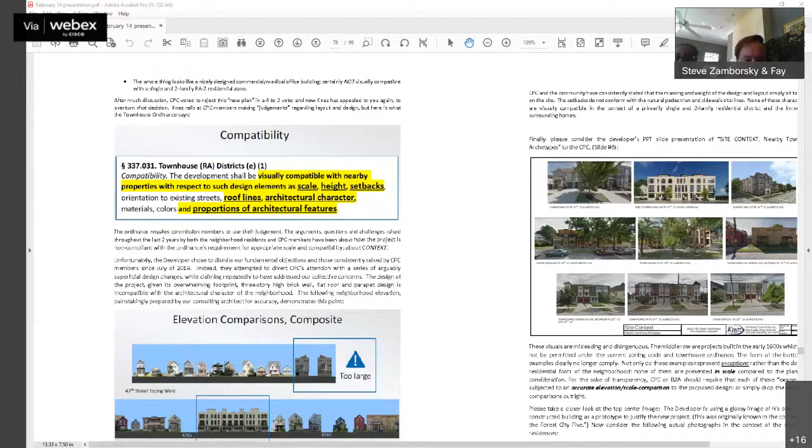And if you look to the bottom of page 3, the elevation comparison composites were painstakingly prepared by our consulting architect for accuracy. These are scale photographs of the adjacent and nearby homes along West 47th Street and Bridge. They clearly demonstrate the point of the enormous scale of the proposed project.

So we and the CPC members have consistently asserted that the massing and weight of this design simply sit too heavy on the site. The setbacks—I have to respectfully disagree with Hannah—do not conform with the natural pedestrian and sidewalk sightlines. The proposed design is not visually compatible in the context of the immediately surrounding homes, which are in a primarily single 1 and 2 family district.

And then finally, Hannah showed you the developer's PowerPoint slide of site context and nearby townhome archetypes, which is over there on the right of your screen. If you look carefully, these visuals are misleading.

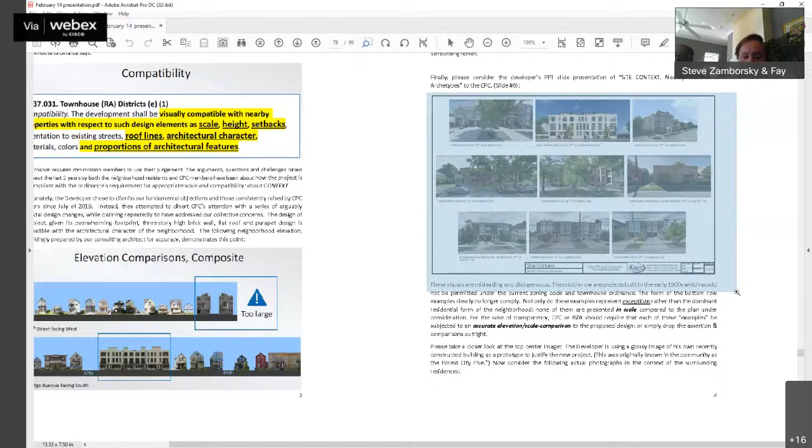The middle row are projects that were built in the early 1900s, which in general would not be permitted under the current zoning code and townhouse ordinance. Maurice, can you blow that one up, please? Thank you, continue please.

So the middle row, these are early 1900s buildings. They wouldn't be permitted under the zoning code and townhouse ordinance of today. The bottom row is a form that probably most of you are familiar with, that would never be accepted because of all the driveways and so on. But ironically, the setbacks on those are about 15 feet each.

And then in the top row, over on the top left, that is my townhouse.

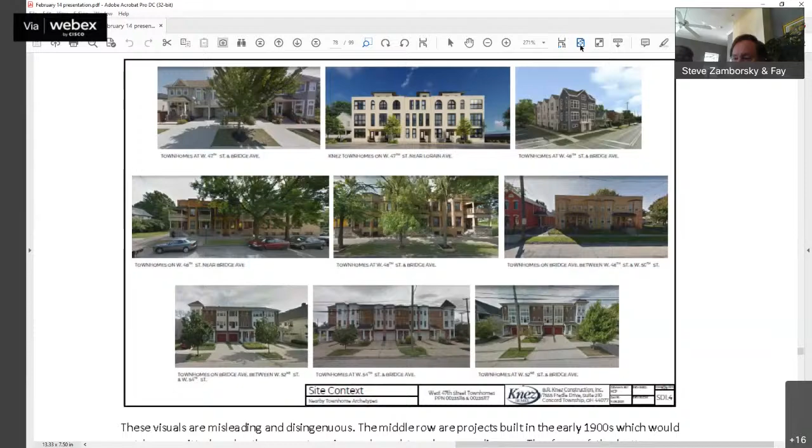My townhouse is nowhere near as large as the picture in the middle. Most of these examples, including the picture in the middle, which is Mr. Knez's own project on 47th and Lorain, represent exceptions rather than the dominant residential form of the neighborhood. None of these are in scale compared to the developer's plan you saw on page 1, so everything looks comparatively in scale to each other. At the very least, they should be subjected to an accurate elevation and scale comparison to the proposed design.

Now, you did look closely at the top picture in the middle of these archetypes. If you go to the next page, Maurice, please. These are photographs of that actual building in the context of the surrounding homes. Can you blow that up to fill the screen a little better? Easier to see, thank you. So this is the actual building compared to what you saw in the comparative example on the earlier page.

This is a 5-unit single row prototype of what the developer is proposing, comparing this to the 11-unit double stacked rendering back on page 2, which the CPC rejected. Also, if you look closely at these pictures, you can't really zoom in that closely.

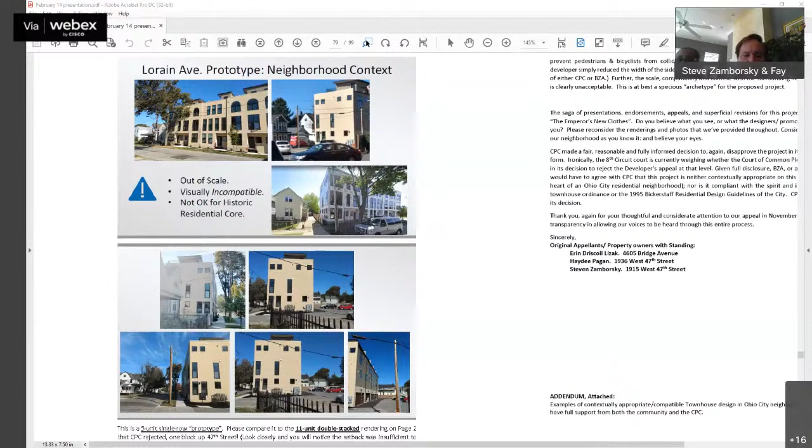Let's see. Maurice, can you zoom in on the bottom section of the pictures, the top right one, or just under the wording? You've already zoomed. Anyhow, okay, that's helpful.

Thanks, Maurice. Also, if you look closely, you'll notice the setback was insufficient to prevent pedestrians and bicyclists from colliding with the open ground floor casement windows. So the developer simply reduced the width of the sidewalk, which you can see in the bottom right.

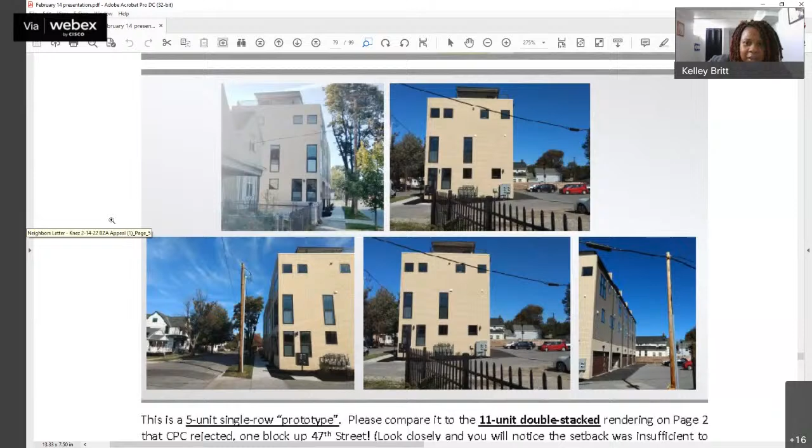Hey Mr. Zamborsky, we're not evaluating this unit, so we're not going to be talking about this. This is not what Knez is presenting today. I understand what you're trying to say, but we can't look at that. Okay, well, thank you.

I think the bottom line is, if you consider all the other photographs, graphs, and commentary here: CPC has an obligation to consider context and all these issues of scale, height, massing, and so on. If you look at the renderings for the project compared to the context of the neighborhood, the project is simply out of scale for this particular site.

I believe CPC made a fair, reasonable, and fully informed decision to again disapprove this project in its current proposed form. Given full disclosure, I believe BZA or any other authority, including the 8th Circuit Court, would have to agree with CPC. This project on this specific site is incompatible in the heart of the Ohio City residential neighborhood, and it does fail to comply with the spirit and intent of either the townhouse ordinance or the 1995 Bickerstaff residential design guidelines of the city. So I believe CPC acted properly in its decision.

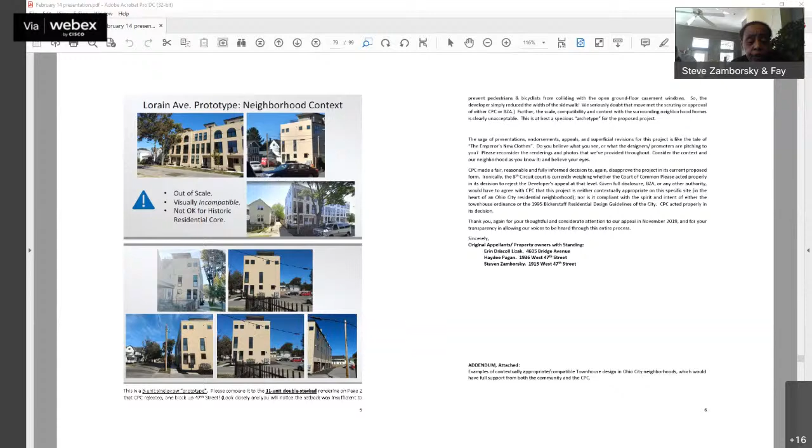But we are being labeled like we do not want development. And we do, we want development. We just want appropriate development.

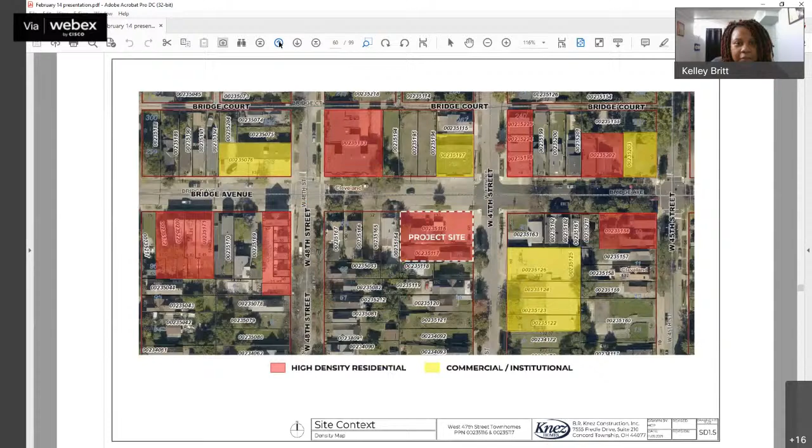Haydee, are you there? I thought she was there. Hi, Haydee, are you there? Can you hear me? Yes, there you are. Okay, go ahead. I was muted and didn't realize it.

Thank you very much for listening. I just want to add a few things that were not discussed. First of all, there was a lot of discussion at the Planning Commission meeting. I attended. Second of all, they did ask why not make those changes, but the decision was based on two areas.

Two of the members on the committee stated that the building was too dense for the site. That was a major reason, and it was reiterated. It was stated and it was reiterated after the vote.

The second thing is that there was a big concern about the safety of the auto courts because the entrance to the buildings are on the front and in the rears. The only way to exit is through a garage door, and there were no man doors. And basically the statement was, 'I'm concerned about the safety and this is no way to live' regarding the auto courts.

So I state this because Mr. Coyne says that there was next to no discussion, and yes, there was discussion. The second item I wanted to make, and this relates to the auto court also, is that earlier someone made the statement that 22 feet is pretty tight.

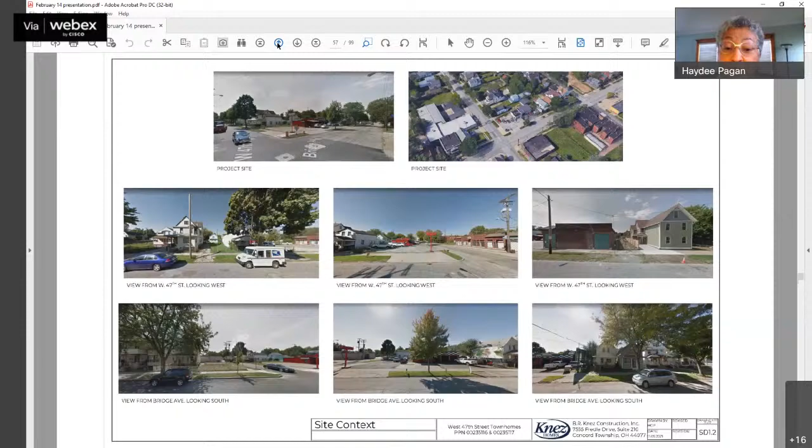Well, in this auto court, we're talking even less, 20 feet. So I wanted to point that out.

The CPC did state that the new townhouse code, because it had not been passed, was not to be used in making a decision about this. They were appreciative of some of the changes. They pointed out also that there were other parts of the new townhouse code that were not looked at. It was picked and chosen.

Another point that I want to make is, yes, those buildings are absolutely gorgeous. I agree, they are gorgeous, but they are too huge for that setting. All those buildings will get beautiful light, I will not, because my house is completely blocked from any sunlight.

Also, if you were to look at the drawing of the rendering and you see the split between the 8th and 9th building, when you saw the renderings, you saw that even in that small area, there was shade. There was hardly any light. So it is blocking a lot of light.

And I just want to check real quick to make sure that I didn't miss anything. But basically, I agree with the Planning Commission. I know that I have worked or tried to work with Knez all along, and I am not against development. I just don't think that this is the appropriate plan for this site.

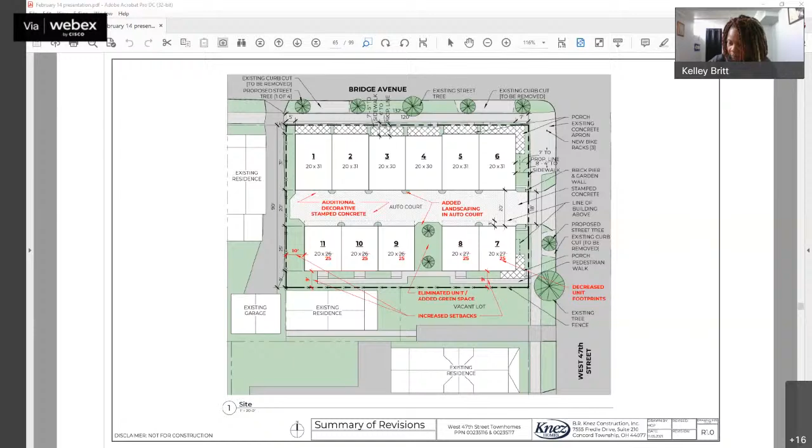Okay, go ahead, Hanna. Hi. Really quickly, I just wanted to follow up on some of the things Tony mentioned. The first was in that elevation comparison shown in Mr. Zamborsky's letter. We've seen this image before, and I checked it. Our building, as shown in his image, is not true to scale. So I find that very misleading. And I just want to note that our building is not scaled properly in the elevation comparison included in his letter.

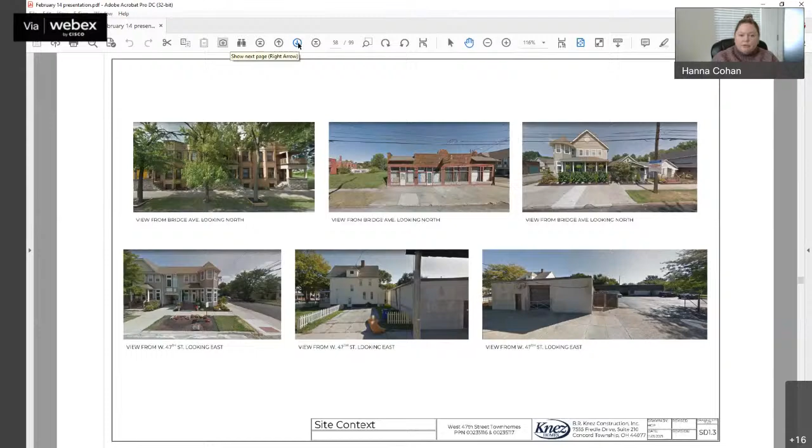And the other thing I just wanted to speak to, all the comments about the building features, the site appropriateness, setbacks, materials, the aesthetics, the massing, all of that was approved and received very favorably at the design review. We went to Near West Design Review with this many times over different iterations, and we've gotten very positive feedback. And some of the more subjective items in the townhouse code that have to do with the design of it were all, in my opinion, appropriately vetted by the specific design review committee for the project.

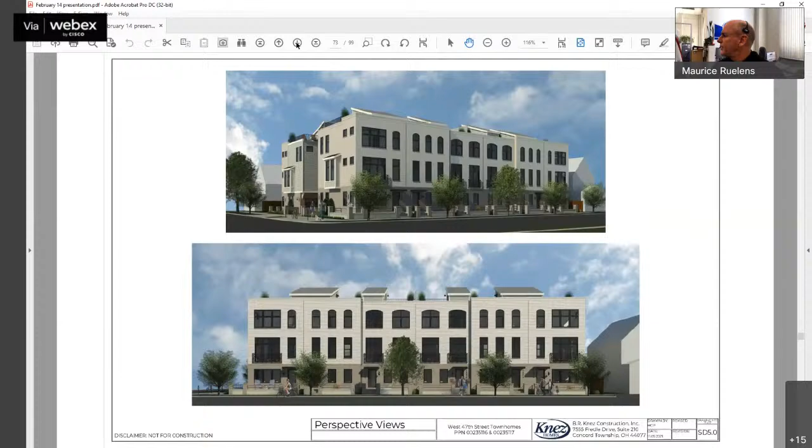Thank you, Maurice. I don't know if anybody brought this up, but let me go back to the conditions that they put on. The one main condition was that they would move Building 9 next to Building 8, to move this green space closer to the existing residents and provide a little bit more relief there, which they agreed to do.

Okay, thank you. I will also say that we only heard this case because of the appeal. It's clear that the building had met all the zoning codes, so we wouldn't even be here if the project did not get disapproved by Planning Commission. The only reason it went to Planning Commission was because you're doing a townhouse in a two-family district. All right, I think we got all the facts out there, board.

Madam Chair, this is Ms. Barnes. I'm a little confused — if they're in court, why are we stepping in the middle of their decision? I think we should wait to see what the real decision is before we, as a board, step in. No, Ms. Barnes, I tried to clarify that earlier. So they did take it to court, and the court told them to use some kind of mediation with the city and arbitration to figure out what to do. Part of that is to come to us. So if we go ahead and make our decision — if we decide to overturn the decision, then that will be it. And if we decide to agree with Planning Commission's decision, then they'll take it further to court. So we do have standing right now to rule on this case.

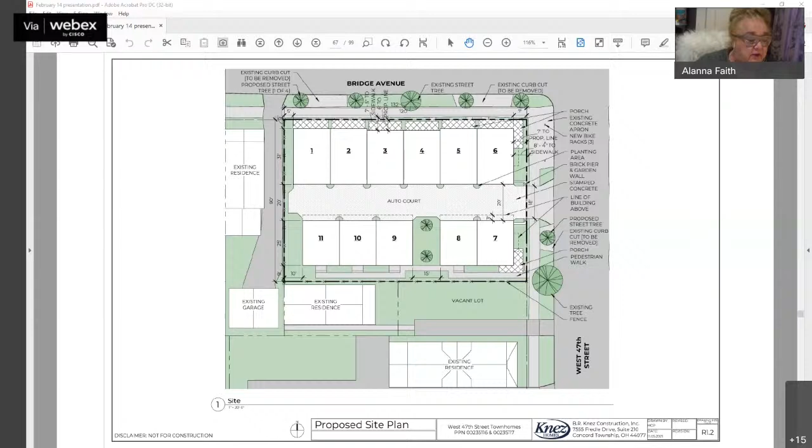So we've heard a lot of testimony, pro and con. Appreciate the comments from city planning as to what transpired in the CPC meeting. But before us is the decision to overturn CPC as being arbitrary, capricious, et cetera. So our decision is then to make the ruling on that. So I am going to make the motion that we uphold the city planning decision so that we can vote on this.

Second. So your motion is to keep the denial from city planning? My motion is to keep the denial so that we can make a vote on this. I'm confused — we're either making a motion to uphold their decision or making a motion to deny it. Right. So which one do you want to do? I'm making a motion to uphold their decision so that we can move to a vote.

No, you want to move to a vote to uphold the decision. And we have a second. Right, I'm making a motion to uphold CPC's decision. All right, motion on the floor. Can I have a second? Second, Ms. Barnes. Ms. Barnes with second. Go ahead, call the roll, Ms. Kukla.

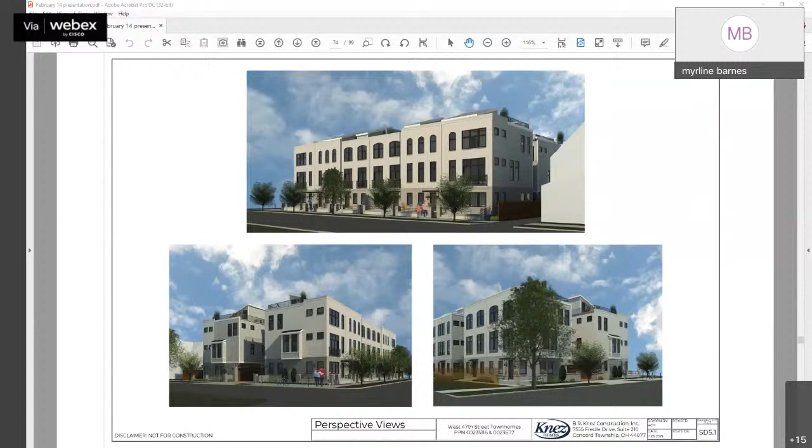Second by Ms. Bates. Go ahead, call the roll, Ms. Kukla. Ms. Barnes? I'm not agreeing with that. I oppose, I'd like for the city to stay where it's at. So you say no? No. Ms. Bates? Yes. Ms. Brown? I'm voting yes. Ms. Britt? Yes.

Calendar number 21-192 is granted. You have decided to overturn the decision of the City Planning Commission. This denial will be ratified next week, and we will send the appellant a letter. Thank you. Thank you.

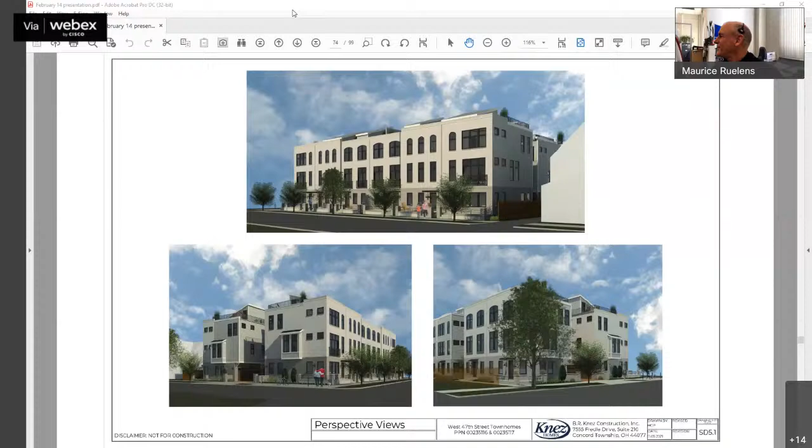Thank you. Then we have a request for reinstatement. What's going on here, Liz? The attorney is stating that he did not receive a letter and/or the link, and therefore they did not attend the hearing. The applicant stated that he believed that the architect was going to be representing him. So they are asking for reinstatement.

Oh, is this the case, Madam Chair, from last Monday they were missing? Yeah, that's our no-show. Right, okay. Yeah, I also contacted them by email the week of the meeting asking for drawings and plans and never heard back.

And in this case, Madam Chair, if we do not grant the reinstatement, they'll just have to apply again. I believe they would just have to apply with me again. I don't think Building and Housing would require them to restart with them. Well, considering the history of this, I would suggest that they reapply. I'm in agreement. Board members without objection? Without objection.